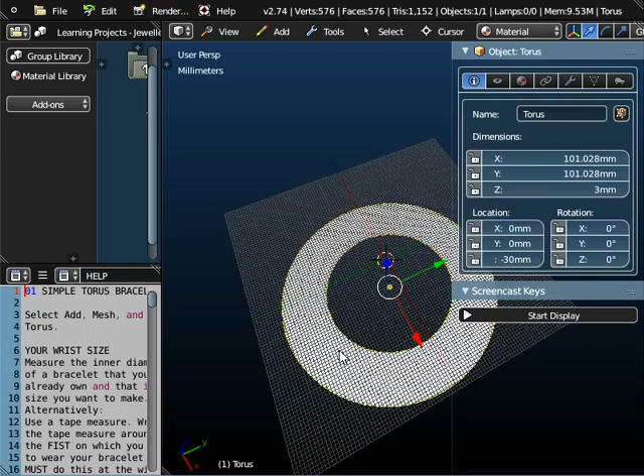It's quite unusual, a little bit large in terms of the external diameter, but that's just because of how we're producing it. We're just going to do it a very simple way today. So first of all, I'm going to start the screencast keys. So any key presses I make, A for example, or return key, they'll be displayed in the window here.

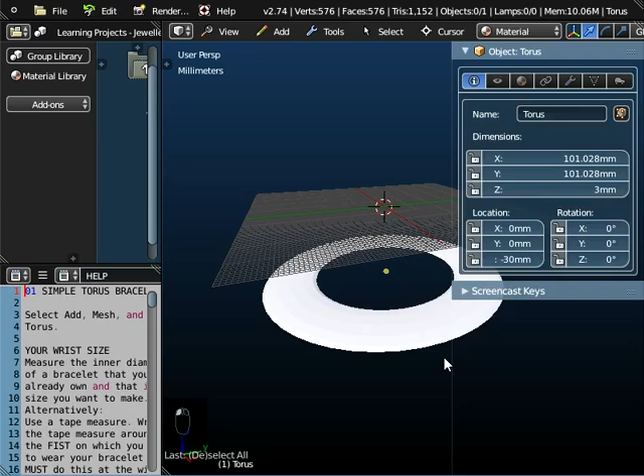And just to remind you that in the help panel here are the instructions that you can follow. The instructions here lead you in a slightly different path from what we're going to do. But if you don't want to watch the video, you can just follow the help instructions and learn how to create this bracelet that way.

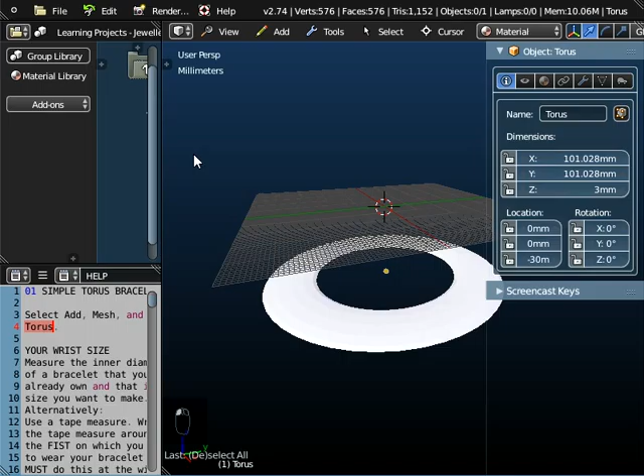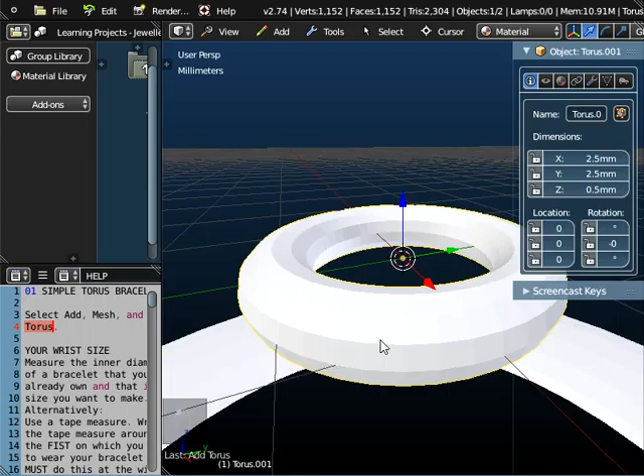So what do we need to do? Well, we need to add a mesh and add a torus mesh. So if we go to add mesh and torus, add a torus mesh, we've got an object in the middle of the screen here, and at the moment we can see that the X and the Y dimensions of it are very small indeed. So if we go view and zoom to selected, you'll see that there's our basic object. That's our basic torus shape, which is what we're going to make the bracelet out of.

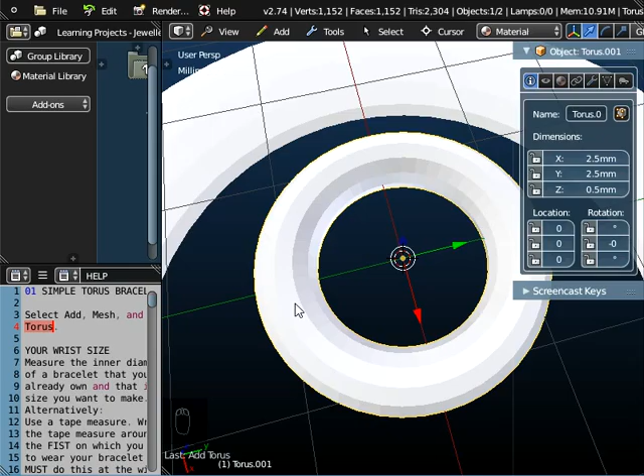But this object at the moment is only 2.5 millimeters by 2.5 millimeters. So X is the red, so it's 2.5 millimeters across and 2.5 millimeters in the Y, that's the green. And the thickness of it at the moment is only 0.5 millimeters. Now that's much too small to be a bracelet. So what we need to do is we need to scale this up.

Now at the moment I'm just zooming out by rolling the center mouse button, just to show you what it looks like. What we're going to do is make this much larger now, so we're going to scale it up. And we're going to make it more or less the same at the bottom. Not exactly, because we'll have to do it a couple of times until we get the right dimensions.

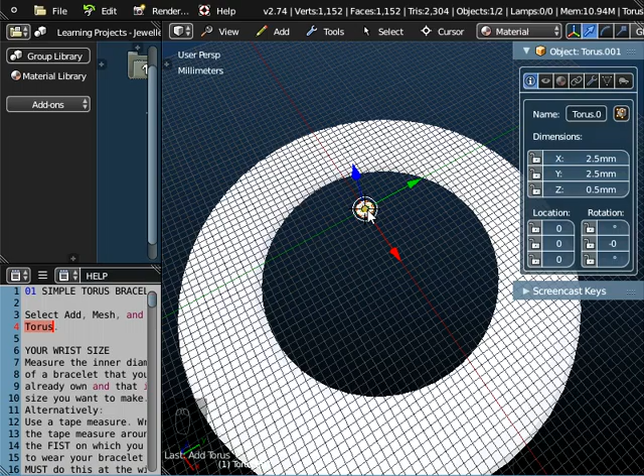So if I press the S key on the keyboard to scale, and if I drag the mouse out away from the object now, I made a slight mistake there, I'm just going to cancel that. I ought to point at the object with the mouse. I had the mouse out here when I started doing that. I should have pointed at the object itself, then pressed S on the keyboard. That way when I move the mouse you can see I've got much better control over the object.

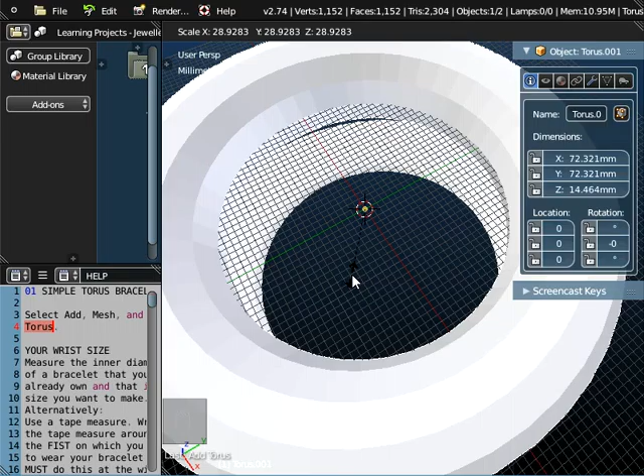Now I need to be looking at the X and Y dimensions in the panel here, and I'm looking for something like 60 or 70 millimeters, that sort of dimension. So I've got 72 there, so I'm going to click the enter key. Now whenever you scale anything in FluidDesigner, one of the things that happens, and I've just opened the toolbox panel here by clicking on the plus sign. I could have done it by pressing T on the keyboard. So T for toolbox will open and close the toolbox.

Whenever you scale anything in FluidDesigner, these values here, these vector X, Y and Z values change. You've got to be very careful with this in FluidDesigner. You need to always keep resetting these back to a value of 1. We don't want any scale factors. They can cause problems with printing.

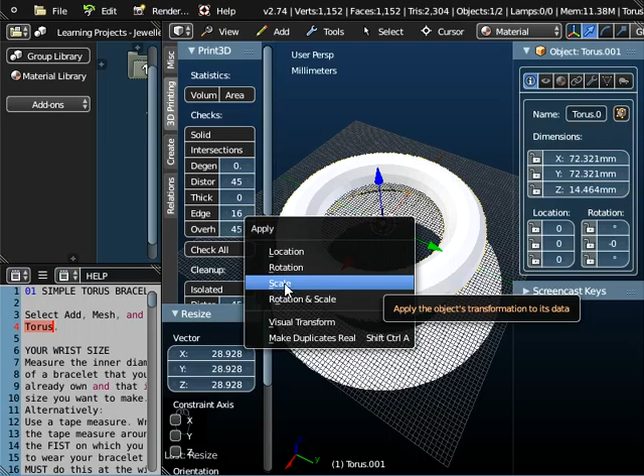So whenever you scale anything, what you should always do then is hold down the control key and press A, and then apply the scale. That will reset those values back now, so there's no object transformation anymore. They're set back to 1. So that's something you do need to watch out for in Blender whenever you scale anything.

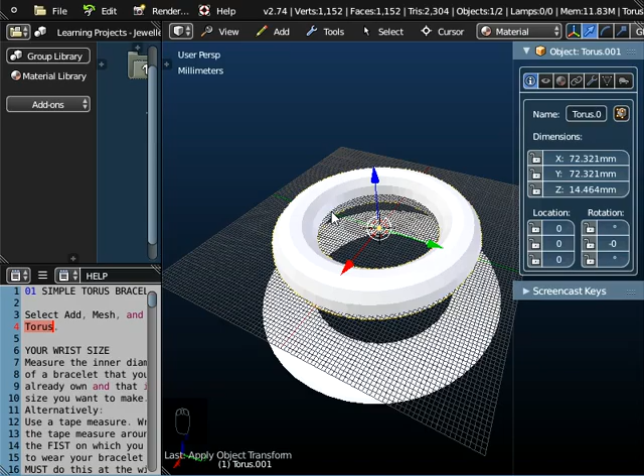Now in order for this bracelet to fit your wrist, you need to know what inner diameter you need for this bracelet. And so we need some way of measuring it. Now first of all I'm just going to move this lower object out of the way, because I want to look at the new torus from the top, and I want to be able to measure the inner diameter.

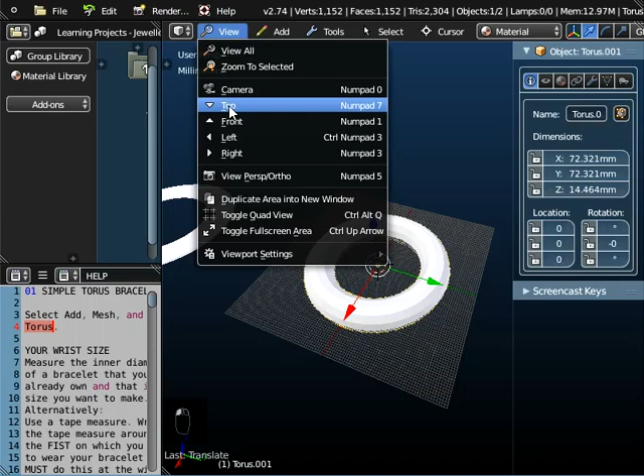So with the torus highlighted, if I go to view and top view, and then if I just scroll the center mouse button, we've got this interactive ruler here, so I'm going to use it to measure the internal diameter of this object. First of all, I'm going to scroll in. This will give me a better degree of accuracy when I measure this. And if I look across there, that's about 42 millimeters at the moment.

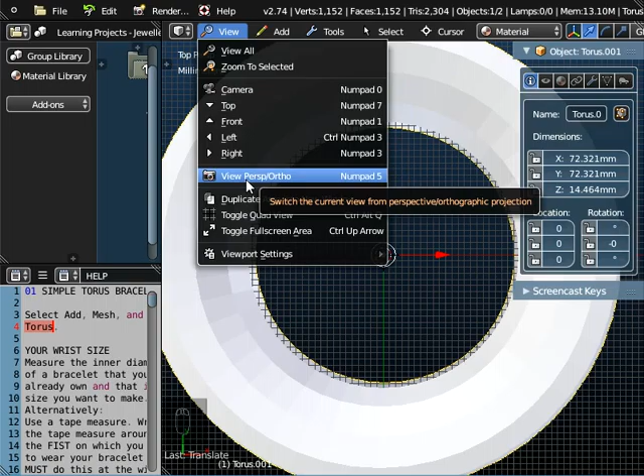Now, I don't know whether you can actually notice this, but the edge at the back there and the edge at the top is in a different location, and that's because at the moment we're looking at this from top in perspective mode. So another thing I'm going to change here is if I go to view, if I click on this one here, view perspective/ortho, I can switch from perspective view to ortho view.

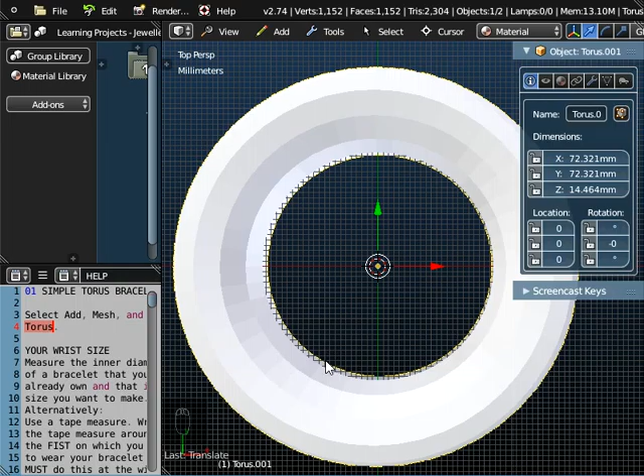Now you really need to be in ortho view when you measure, because if you look now you can't see the back edge of this object. If we're in perspective mode, and this just toggles between perspective and ortho, you're looking into the object here and you're getting a false impression of the back of this object. You can actually just see this is the back of the object and this is the front of the object, and they're in different locations, which is what you would expect in perspective mode. So we really ought to be in ortho mode when we measure this.

So if we just try again, it's only made a slight bit of difference. That's 43 mil. But you do need to be aware of this difference between ortho mode and perspective mode.

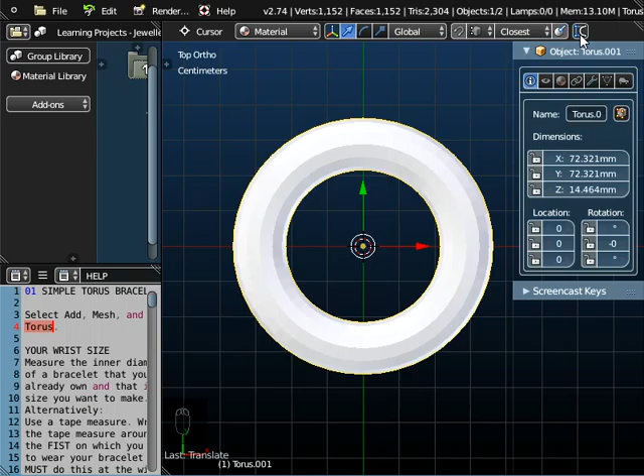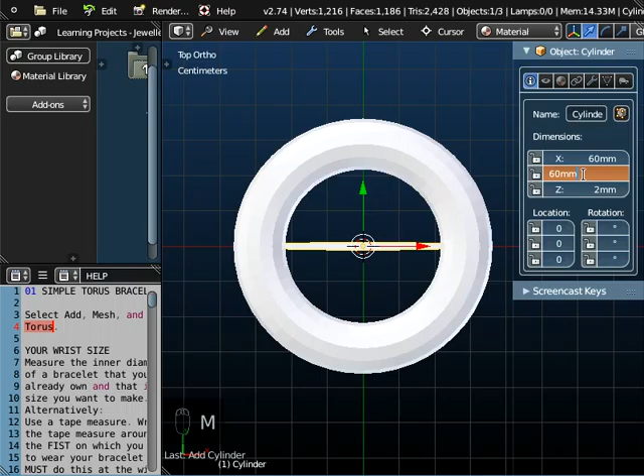Now if you've decided that you want an internal diameter here of 60 millimeters, let's say that's the size that you want, rather than keep messing about with a ruler, a good way of actually doing this is if you add a mesh and if you add a cylinder. Now at the moment that cylinder is only 2 millimeters by 2 millimeters, but if I change this to 60 mm for millimeters, and change Y to 60 mm, I've added a cylinder there now.

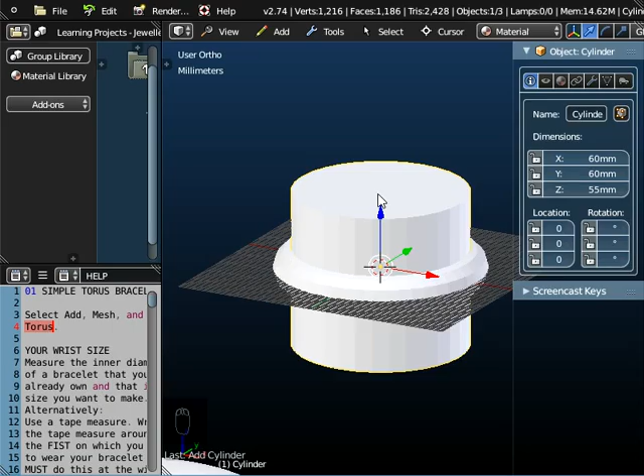Now you can't see it terribly clearly, so I'm also going to increase the Z value. I'm just pointing at the bar and dragging the mouse now to change the Z dimension. Okay, so there's our cylinder, which is now 60 X and 60 Y. In other words, the diameter of this cylinder is 60 millimeters. And I'm going to use that so that I can resize my torus so the internal diameter is exactly 60.

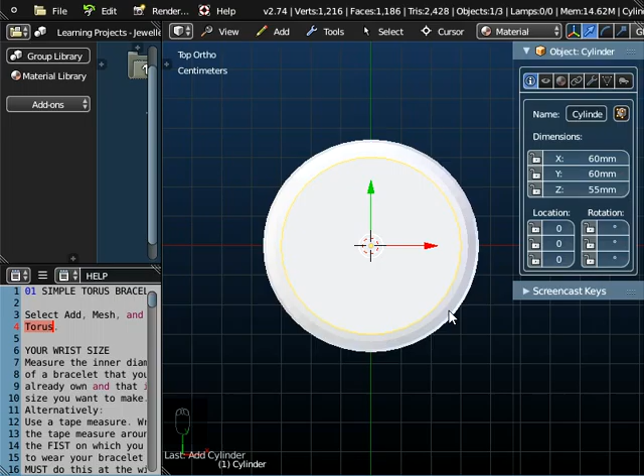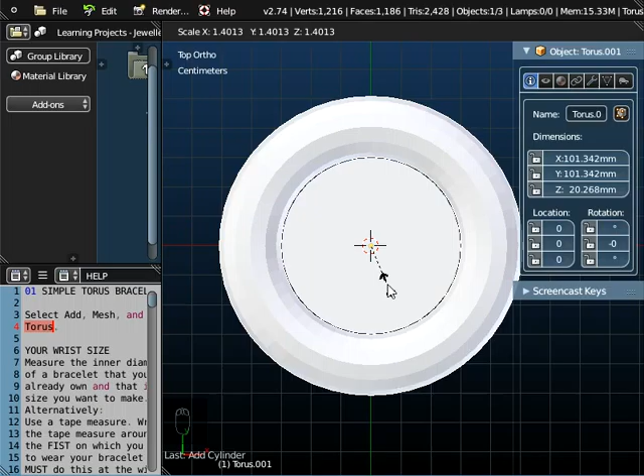So if I go to view and top again, I now need to click on my torus, make sure the torus is selected, and you can see it says torus here. And again, if I point towards the center of the object and if I press S for scale, I can move the torus now, and as you can see, once I get almost no gap there, what I'm doing is creating an internal diameter for my torus of 60 millimeters. So that's a way of getting an internal diameter by using this other object, this cylinder.

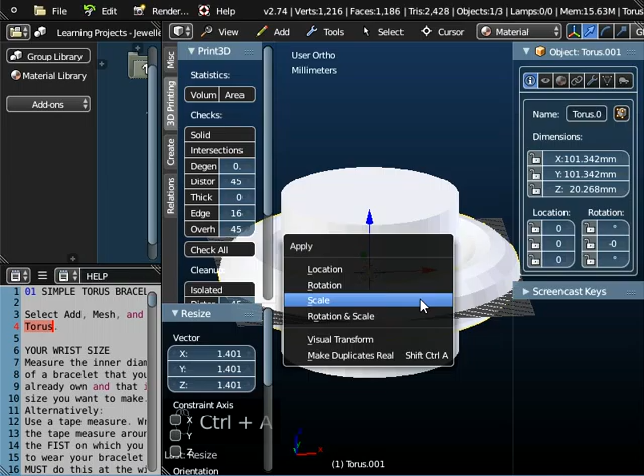Now remember again that when we've scaled that, these vector values will have changed. Whenever you scale an object up or down, the vector values change. So while the object is still highlighted, always do Control A and apply the scale, and that will reset the vector values there. You don't need to always keep opening up this panel, but you do need to keep resetting the scale, unfortunately, in Blender.

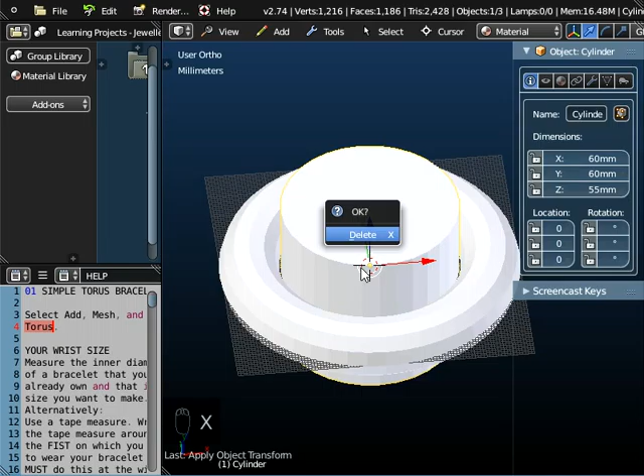Now, we don't need this object in the middle here, this cylinder. We only used that to get our internal diameter, so we can highlight that and press X on the keyboard and then delete that inner object.

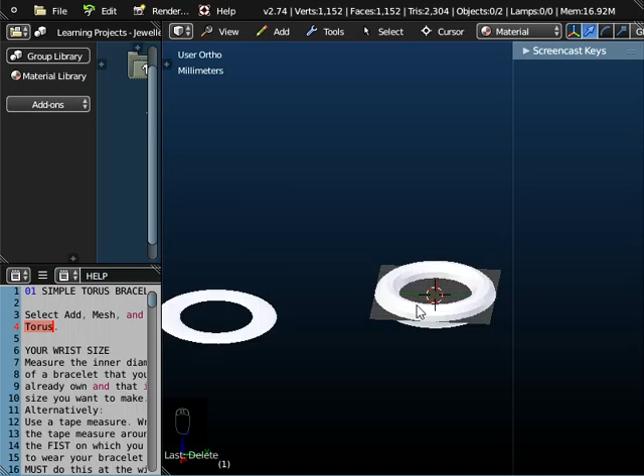Okay, so there's our torus now. Now at the moment we've got the inner diameter of 60 millimeters, which is the size that we're choosing to do for this lesson. Like I say, you could do it at any size that suits you. What we need to do now is to reduce the thickness of this object. If we tried to print this, it would be horrendously expensive because of the volume of the material.

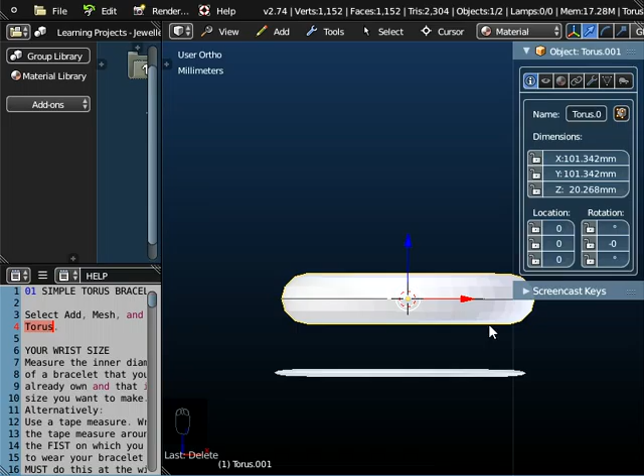So we're going to show you a simple way of resizing this object and thinning it out. So what we're going to do is, if we go to view and front view, we're going to scale it again. This time we're going to scale it in the Z dimension only. And the way to do that is we press S on the keyboard for scale.

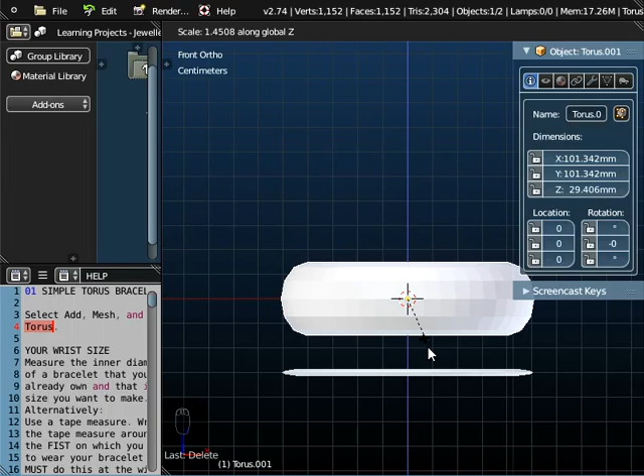Now if we scale it like that now, it's going to scale in all dimensions, and you'll see all the values changing up here. But if I press Z on the keyboard, what that does is it restricts me to only scaling in the Z dimension. And so what I want to do is reduce that down to about 3 mil. So that'll do, 3 millimeters, and then click. So we've scaled it just in the Z dimension.

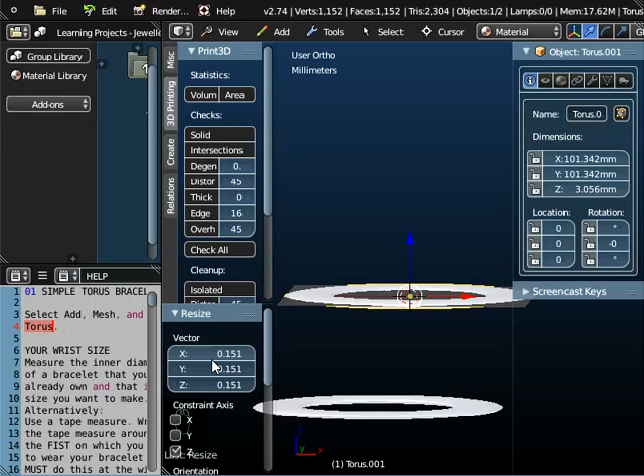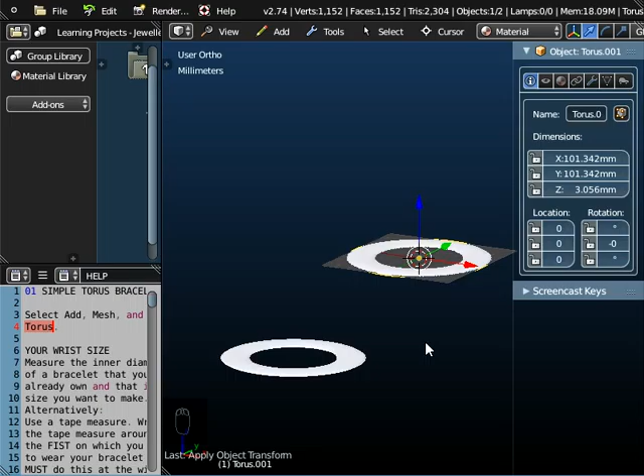Now again, if we open up the toolbox here, you'll notice that the vector values have changed again here. So what we need to do is Control A and apply the scale to reset those values back to 1. So there's our object. It's not a particularly great bracelet, but we're just trying to show you how you can use a simple torus, how you can scale it and actually create a bracelet.

So what we're going to do now is we're going to delete that object. So highlight it and press X on the keyboard to delete it. So we delete the original torus bracelet. This one now we need to save. And always in FluidDesigner we recommend that you go to File and Save As. Don't save it over the original learning file.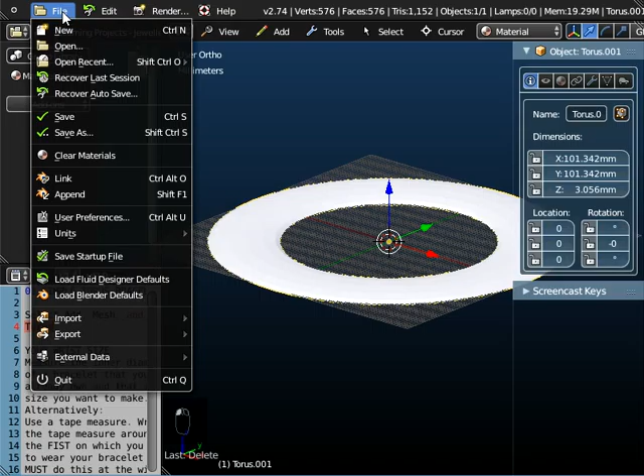Come up through the menu system. Look for the My Projects, Jewellery Projects, Bracelets folder. And you can save this lesson as 01 Simple Torus Bracelet. And you save it as a Blender file. Now you can't print Blender files, so with Fluid Designer you've always got to export these in a printable file format and also run them through Netfabb Basic to check them and make any corrections to the meshes. So if you go to File and Export, we like to use the Wavefront OBJ format.

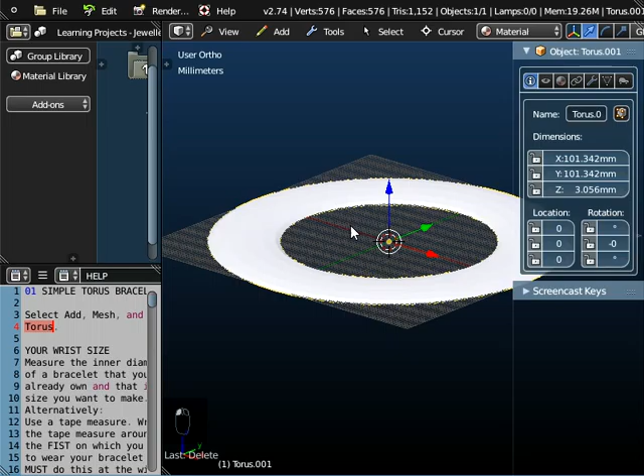I'm going to save it to the desktop. So we're saving it to the desktop, 01 Simple Torus Bracelet. This time we're saving it as an OBJ file, an object file, which is a printable file format. So we export that to the desktop. Now you then need to start your application Netfabb Basic. And if you haven't got it on your system, you can always download it for free from the internet.

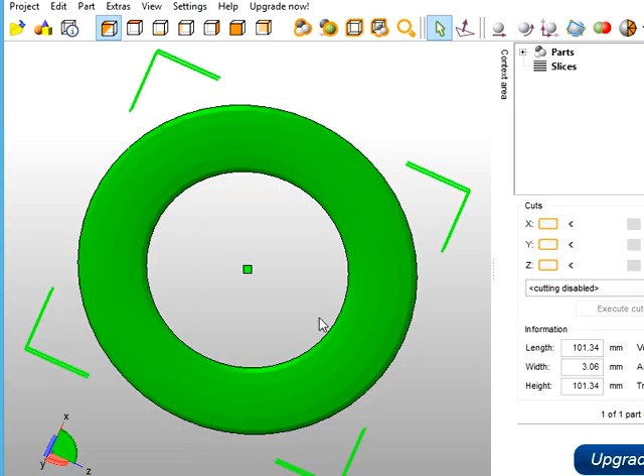So it's Netfabb Basic. And if you go to Project and Open, go to the desktop, open the Simple Torus Bracelet. Now sometimes you'll find there's a warning red triangle here which says that there's something wrong with the mesh. We're not getting any problems with this particular one, but we would always recommend that you go to Extras and repair the part, just in case. And what Netfabb will do is it will triangulate the mesh. So you can see it has changed this mesh into triangles.

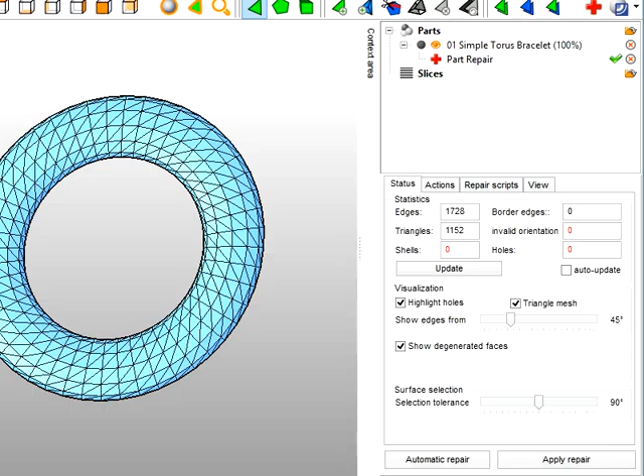Whoops, I've lost my Netfabb. I just want to move Netfabb Basic across a little bit. It doesn't fit properly in the video capture window. What you should always look for in Netfabb are any problems over here. Well, we've got some red numbers at the moment, but if you click on Update, you'll see we've got zeros here. There's no edge problems, no orientation problems, and no holes. That's all a good sign.

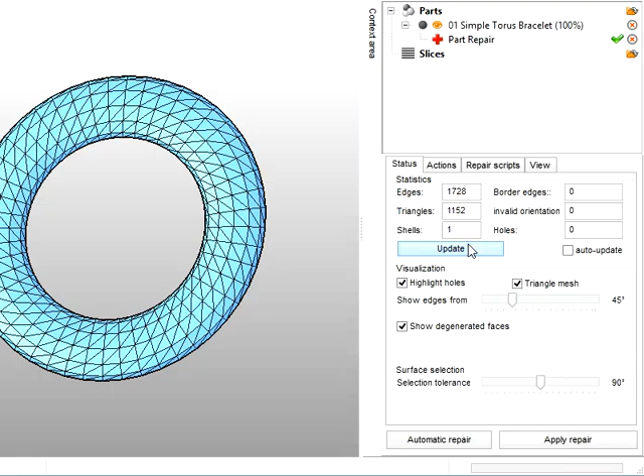But again, we would always recommend that you automatically run the repair and execute it. That will triangulate the mesh. I'll just click Update again, you'll see there's still no problems. And always click Apply Repair and remove the old part. And that's now got our object repaired. It should be a fully printable file now.

All we need to do is to go to Part, export it as a Wavefront object, export it to the desktop, and it's 01 Simple Torus Bracelet repaired, and it's an object file, and that's the file that you would send to the printer if you wanted to actually print this bracelet.

Now there isn't a lot of depth here. It's not really the best bracelet to print, a little bit simple, but we're just showing you what a torus is really and what scaling is in Fluid Designer. Okay, so that's it for today's lesson.